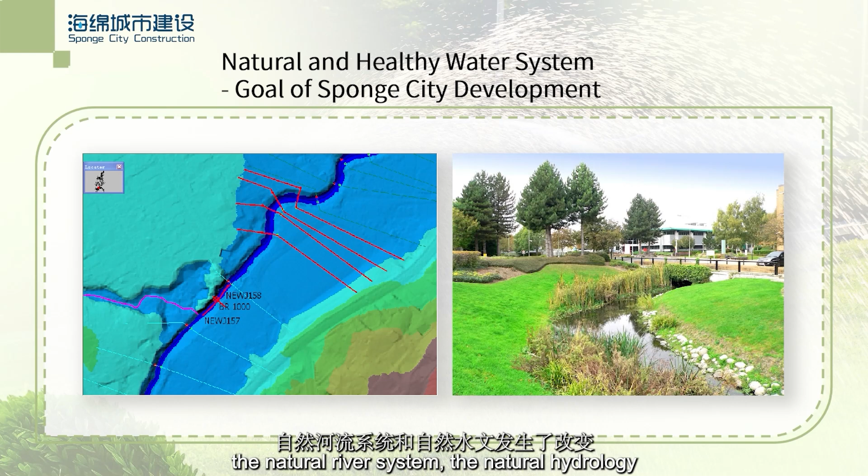But when we are building cities, especially in the last 20, 30 years in China, we have been developing rapidly, building many big scale cities in many places. So what has changed is the land use, the natural river system, the natural hydrology. As we normally see in most cities, we are having some flooding issues, water quality issues, or ecological issues. All these are the result of rapid urban development.

We will see a lot of green infrastructure in many cities. People may not notice, but all these things were actually designed and built on purpose, trying to mimic the natural hydrological environment. So there are a lot of swales, pervious paving, and wetlands, many different types.

As a technical tool, how do we build a hydraulic model? Yeah, this is very technical. The computer model tries to mimic the natural system, right from rainfall, because everything sources from the rainfall from the sky anyway, and then drops on the ground, and then we mimic the natural water system.

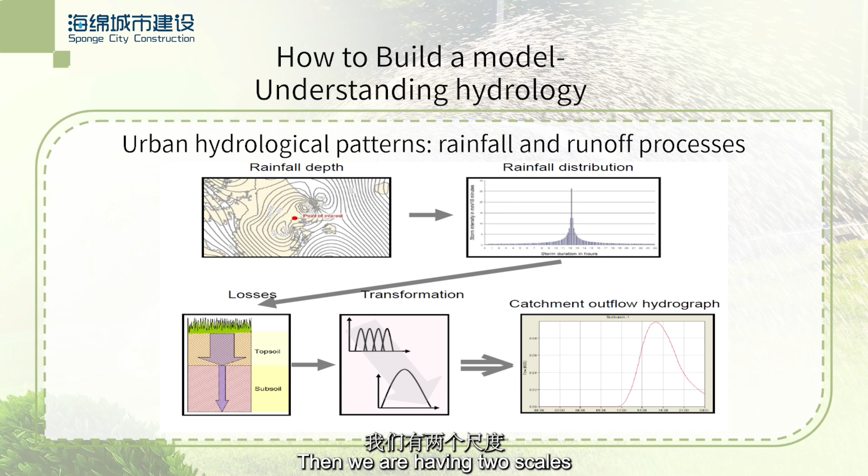That's the first step. But then you have to understand how water penetrates as well as how water travels in the pipe system, in the river system, in an urban area or urban environment. Then we are having two scales. One is a big scale, at a city scale or at a catchment scale.

For example, as we see here, for a city scale, which is the major one for most of the systems we are having, you have to understand urban planning. So you need to get a lot of information from urban planning.

What are the geographical features? You have to understand the digital elevation model, or collect the digital elevation data, as well as the pipe system, the river system, the features or engineering infrastructure. All this information you have to collect and then input into a computer.

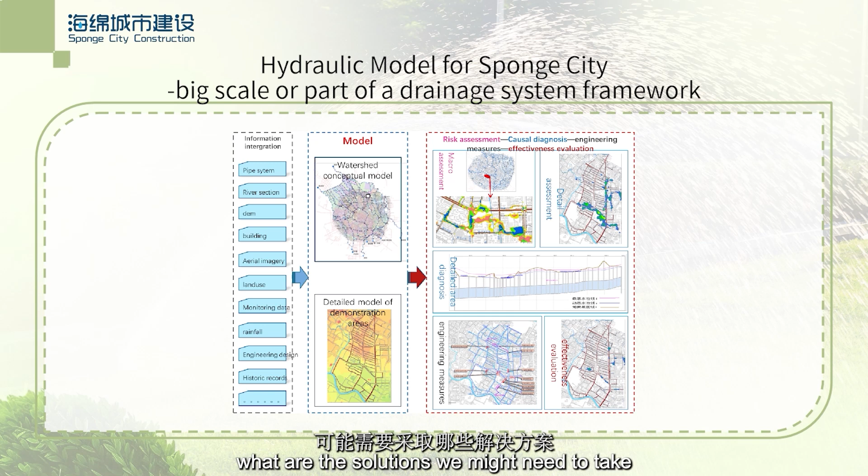Then the computer will model the pipe system, river system, model the dynamics within the whole major system. But then the computer will identify the problem area, the level of the problem and level of risk, and then try to understand what solutions we might need to take to alleviate the issue. So this is a major city scale, and a big one.

But down to the next level, which is at the source, because we know a city has a very big area, but most of the water flows from a catchment block, or maybe a commercial area or somewhere. We call it a source catchment. So at the source catchment, within the Sponge City concept, we build many green infrastructure, like around the roads, or in a residential area, or in a commercial or business area. So those green infrastructures need to be modeled properly because there are so many.

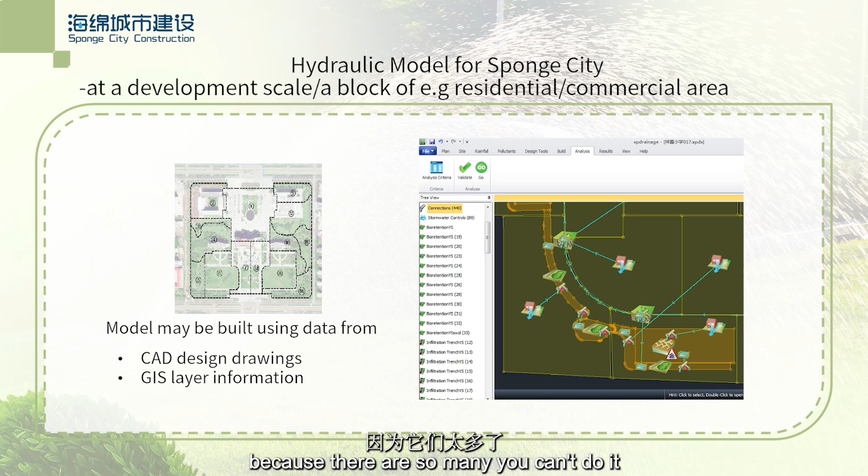You can't do it by hand calculation. Again, we have to use a computer. We will model this individual infrastructure with a computer model, mimicking the natural behavior of water penetrating through this infrastructure and down to the system.

For a single infrastructure, like a swale or rain garden, you have to understand how they perform and function to manage stormwater. We need to input various parameters like infiltration rate, type of plants, type of soil, and the scale of the physical parameters of the facility. All of that will be input, then the computer will model the process.

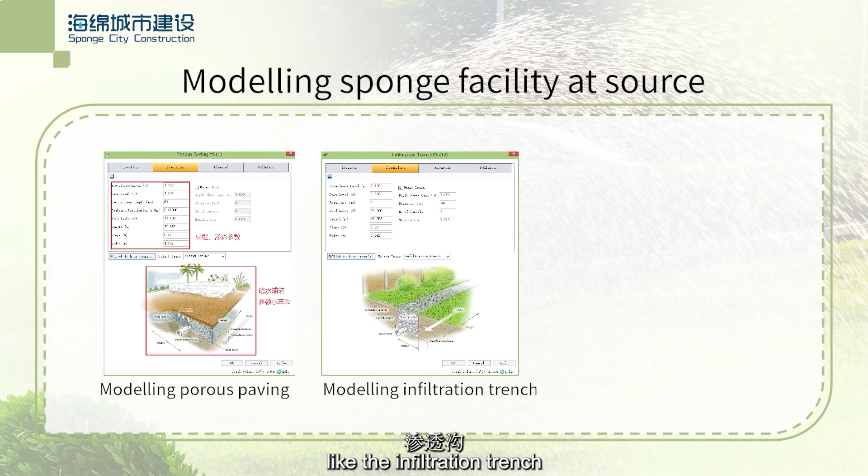The computer can model all sorts of green infrastructure, for example porous paving, infiltration trenches, swales, and many other types. Each type will be modeled by their individual relevant parameters and also the scale of these facilities.

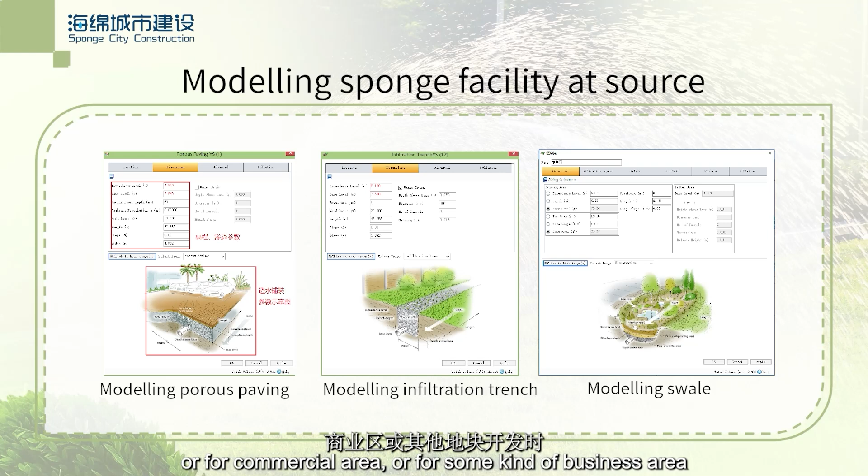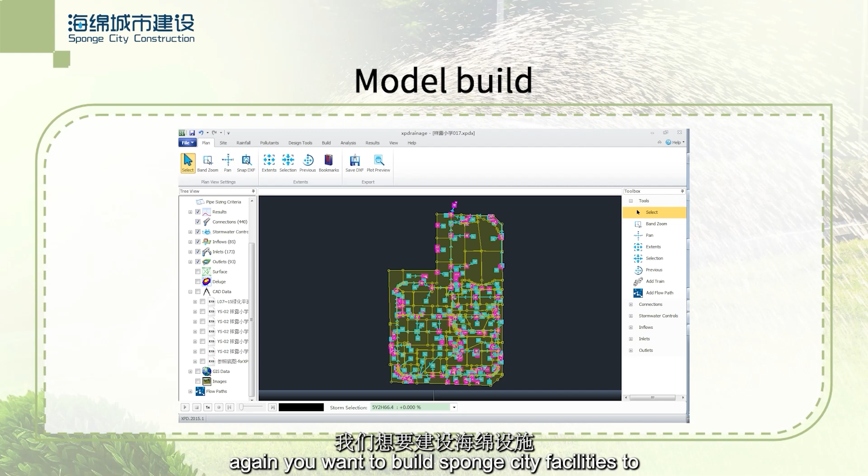At development scale, for example if developing a residential area, commercial area, or business area—like this design for a primary school with maybe 20 to 30 hectares—you'll build many buildings, roads, and also sponge city facilities to alleviate the water issue within that development area.

Then you build many swales, porous paving, and maybe rain tanks, various sorts of facilities. But in the design, the question is what type of facility you should use and how many you should build. That's a design question.

You need to use a computer model to put all these facilities within your system, then test various situations, and the computer model will show the consequences of the system—for example the flow pattern, water quality treatment efficiencies, and various outputs, which will help you make decisions for planning, design, and optimizing your solutions.

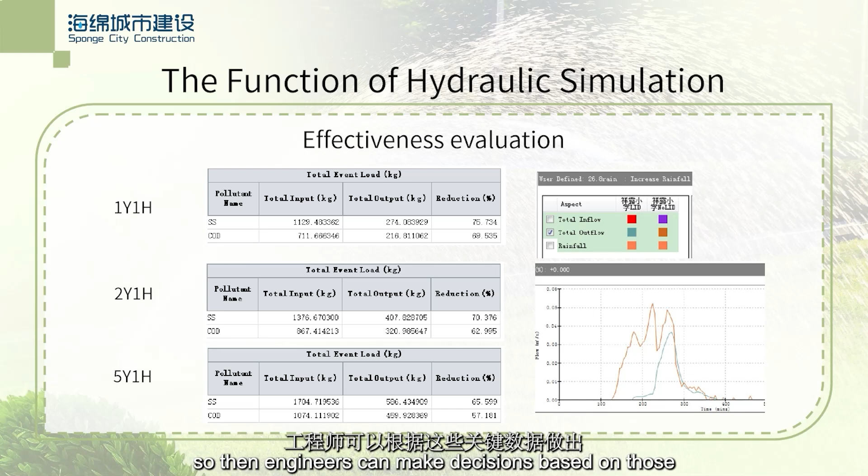A simple example: the computer model will calculate the rainfall, calculate the flow within the system, and tell you the consequence—the resultant flow pattern, the efficiency of removing stormwater pollutants, and the peak flow reduction. Engineers can then make decisions based on those key figures.

As everyone knows, the application of hydraulic models is a very important part. Could you introduce some about it?

Computer modeling is very complicated. It addresses many aspects, starting from rainfall, from land use, from how we develop the city or urban features, as well as testing various engineering solutions to achieve our goal of a natural, healthy water environment. So it covers many aspects.

For urban development, there are a lot of issues involved, like planning, decision making, policies, and engineering solution optimization. All these aspects depend on the key figures we gain from computer modeling.

The computer model needs to address all these planning and engineering features, put them together into the model, test it, run it, and get results. These results are fundamental for us to make policy decisions and for engineering solution optimization.

Computer models are now widely used in most countries, in China as well, in policy development, urban planning, and even in operations. The model is applied for all these aspects.